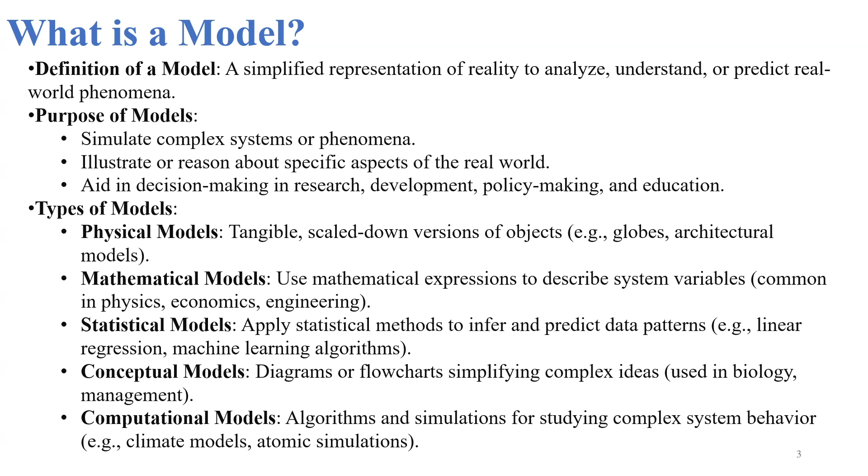Multiscale modeling for mechanical systems can encompass a lot of different aspects. For example, it can consist of atomic structure, molecular structure, mesoscale structure or finite element structure. But the overarching goal is to integrate modeling at different spatial and temporal scales so that we can emulate the real scale phenomenon and we don't have to do experiments over and over, saving computational cost as well as experimental cost.

When we talk about quantum mechanical phenomena, we talk about subatomic particles such as electrons, protons, neutrons, and so on. Electrons are of special interest. There are various methods to solve quantum mechanical phenomena for electrons. One of the most popular is density functional theory. There are different software packages to implement density functional theory, such as Quantum Espresso, VASP, GPAW, Abinit, and so on.

Now we move on to a higher length scale. This can consist of molecular dynamics, where instead of looking at electrons, we look at a system which consists of atoms. There, instead of dealing with quantum mechanical principles, we deal with classical or Newtonian mechanical principles. Using those, we deal with molecular dynamics and force field simulations. Some of the software used for molecular dynamics simulations are LAMMPS, GROMACS, GULP, and others like ASE.

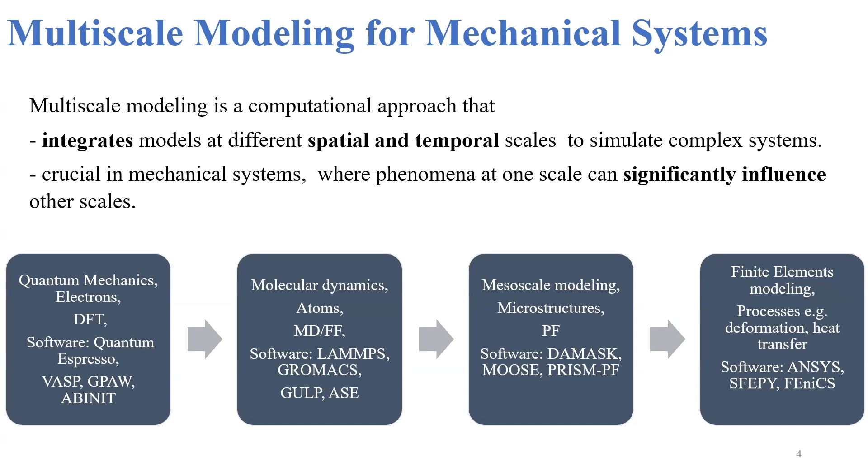So this is just an overview and introduction. During the course, we'll go through the detailed key principles behind these different methods, and also hands-on sessions that will be useful for engineering applications.

Now, this is an overview of different length and time scale simulation methods. We'll see a lot of pictures like this on the internet, where we deal with mesoscale, microscale, and continuum scale phenomena. At the quantum level, we can solve density functional theory or ab initio methods, dealing with the Schrodinger equation, or we can go beyond the femtosecond or nanometer range and deal with the picosecond and micrometer range using atomistic modeling, which uses Newton's principles.

Or we can go beyond that and look into the micrometer or millimeter range using coarse grain mesoscale modeling for polymers, dissipative particle dynamics, and so on. Or we can go beyond that and study using finite element simulation and heat transfer methods. So you can see multiscale modeling has the advantage of studying mechanical principles at different length scales as well as different time scales.

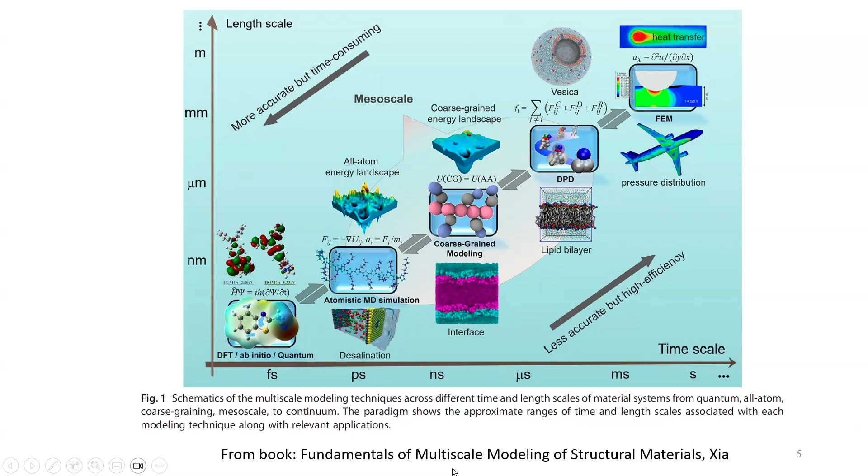And depending on the problem that you are trying to solve, you might use one or a combination of multiple of these methods. You'll see different types of this picture or this plot in different books. So this is one type of representation that is adapted from this multi-scale modeling book, but there can be other similar plots where we have DFT, MD, dislocation dynamics, crystal plasticity, and so on, and where one model is feeding to another model. The information from one model is feeding to another model, such as even density functional theory.

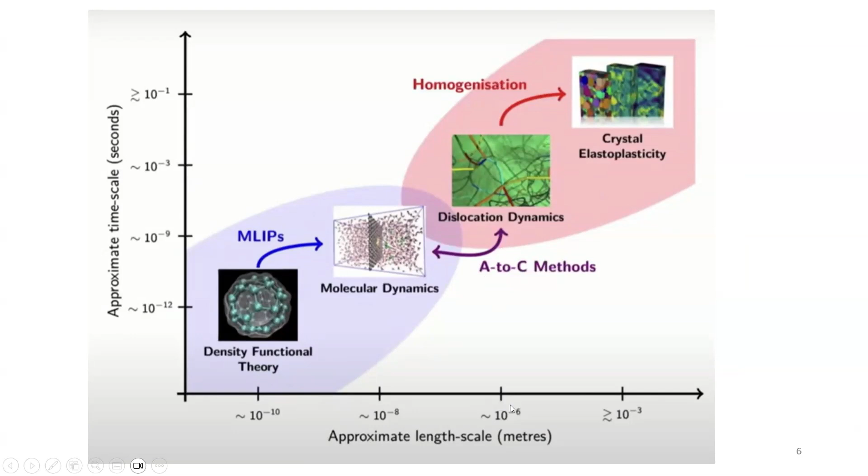We can use machine learning interatomic potentials to feed to molecular dynamics and run temperature-dependent phenomena and large-scale phenomena. So DFT is usually used for 0 Kelvin calculations, but here we can see that it can be used for high temperature and large-scale simulation as well. The information from the molecular dynamics can be fed back to dislocation dynamics and back and forth, that is atomistic to continuum level methods. And then this can be fed, using homogenization techniques, to the crystal elastoplasticity models. And these are some of the approximate length and time scales that are used for certain modelings.

Now, what is multiscale modeling? Multiscale modeling is basically very simple, where we combine different methods that we learned at different length and time scales to solve a particular problem, especially for mechanical systems. So here in this example, we see a molecule simulated with molecular dynamics, or a crack propagation example using FEM, or finite element methods. So traditional approaches such as DFT or MD by themselves can focus on a single scale, but may fail to capture the complete picture of a mechanical engineering problem. And this is why we need multi-scale modeling. So multi-scale modeling can provide a more comprehensive understanding of the phenomenon at different scales, and can be more accurate because it is not looking at only one scale, but at different scales.

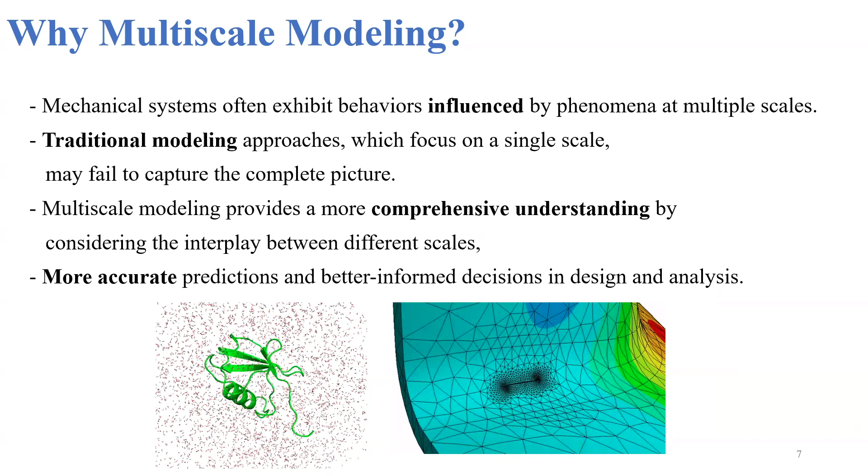Also, the most critical part is how do you validate whether our model is working? So you always have to validate our model against experimental data wherever applicable to make sure that these models actually make sense. So this part is critical, and it's hard to find good benchmark data for validating our model. Now, finally, data integration. We have to integrate data from different sources and scales to make a more cohesive model for a complex process. So that is extremely critical.

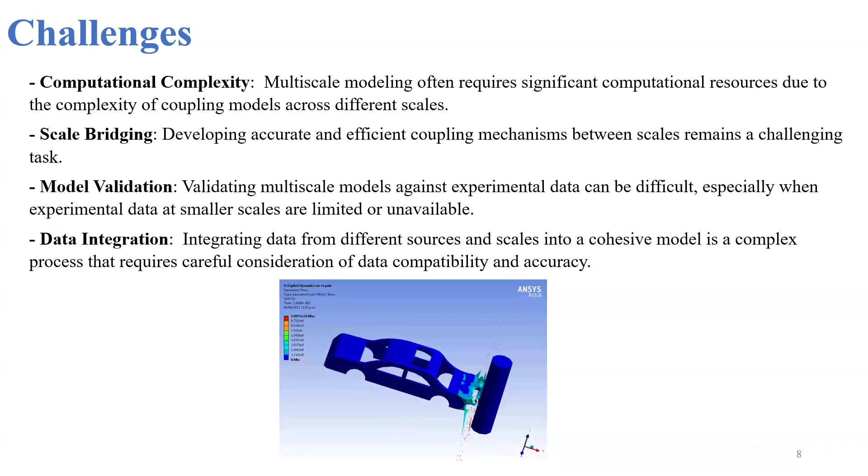Of course, if you have only an iron-based alloy versus an iron and cobalt-based alloy, they might have different responses. So you see, all these methods are kind of interconnected. And it's very difficult to capture the scale bridging and how to validate these models over different phenomena. So we can use this challenge as an opportunity. We can use this as a material design opportunity for multi-scale modeling, which offers the potential to design materials with tailored properties and manipulate behavior at different scales.

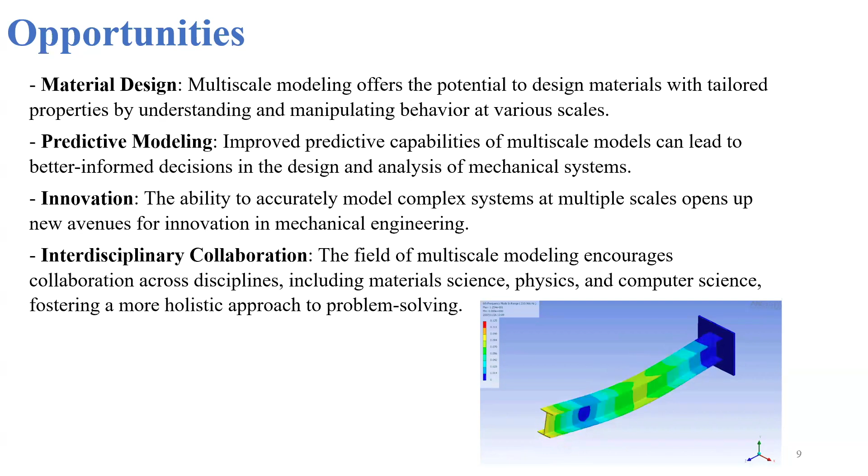We can also use predictive modeling to improve predictive capabilities of multi-scale models that can lead to better informed decisions in the design and analysis of mechanical systems. Or it can lead to different innovation opportunities. So we can look for accurate models or better materials that can solve some of the mechanical engineering problems. Or it can lead to interdisciplinary collaboration, because multi-scale modeling requires information from materials science, physics, computer science, chemistry, and it leads to obvious opportunities for collaboration across different disciplines.

So now I will list some of the laws or principles that you might already be familiar with from your undergrad or grad level courses, but I just list them here to be familiar with, and they will be used for the remainder of the course.

So for example, Newton's laws of motion might be an obvious one. For example, the first law, the law of inertia. Second law is force and acceleration. One of the key principles is force is proportional to acceleration, where the proportionality constant is mass. Or you can have the third law of motion, the law of action and reaction, and so on.

Similarly, very critical or very important are the conservation laws. So conservation of energy, where the total energy of an isolated system is always constant. Energy can be transformed from one form to another, but cannot be created or destroyed. Of course, there can be certain violations or issues, but for mechanical engineering applications, if you're not going to particle physics and so on, I think it's good to conserve energy for a system.

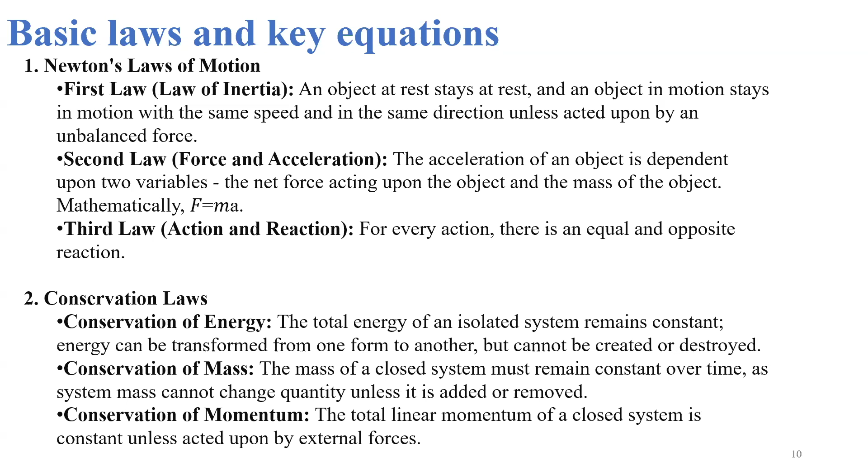Also, you want to conserve mass. So for example, if you're dealing with fluid flow or heat transfer, we want to make sure the mass of a closed system remains constant over time. Also, we want to conserve momentum. The momentum is usually mass times velocity. So you want to make sure the total linear momentum of a closed system is constant unless acted upon by external forces. These are extremely important laws used for mechanical engineering applications.

There are also other laws such as the first, second, and third laws of thermodynamics. The first law says that the change in internal energy of a closed system is equal to the amount of heat supplied, so it's related to the conservation of energy law. Second law of thermodynamics, where heat cannot spontaneously flow from a colder location to a hotter location. This is kind of an entropy argument. Or the third law, which says as temperature approaches absolute zero, the entropy of a system approaches a constant minimum.

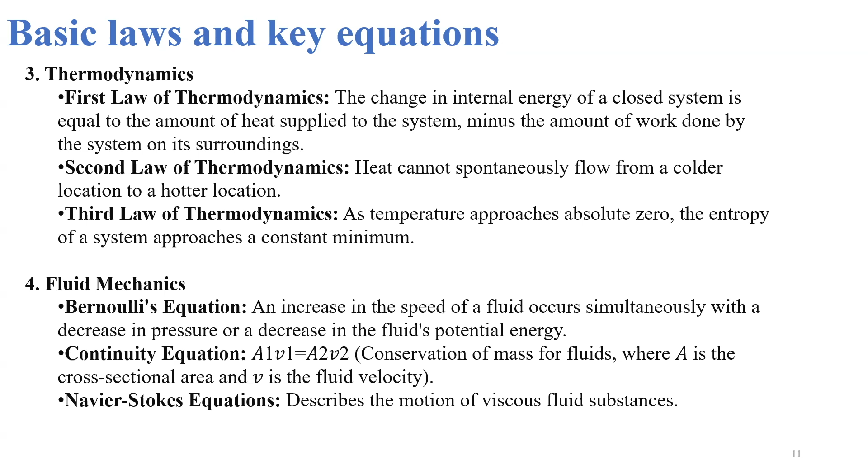Some of the other mechanical principles are the Bernoulli equation, continuity equation, and Navier-Stokes equation. These are important because we'll be solving some of these problems for computational fluid dynamics. For example, the continuity equation is extremely important. A1 V1 equals A2 V2, relating the cross-sectional area and the fluid velocity. For example, if you take a pipe where one end has a small nozzle and one has a bigger nozzle, the area might change, so accordingly the velocity has to change. So that's the continuity equation in fluid mechanics.

Similarly, heat transfer laws. Fourier's law of heat conduction is extremely popular, where it says the time rate of heat transfer through a material is proportional to the negative gradient in the temperature and the area through which the heat is flowing. We are going to work with some of these laws and equations so that you'll have better hands-on experience and actually apply them for engineering applications. Similarly, the Stefan-Boltzmann law and Newton's law of cooling are important.

In material science, of special interest is Hooke's law, which says that stress is proportional to strain, given by a proportionality constant called Young's modulus. This is especially applicable for linear elasticity. Now, if you go beyond linear elasticity, you might have to consider yield criteria, like the von Mises criterion, for which we have to study plastic deformation.

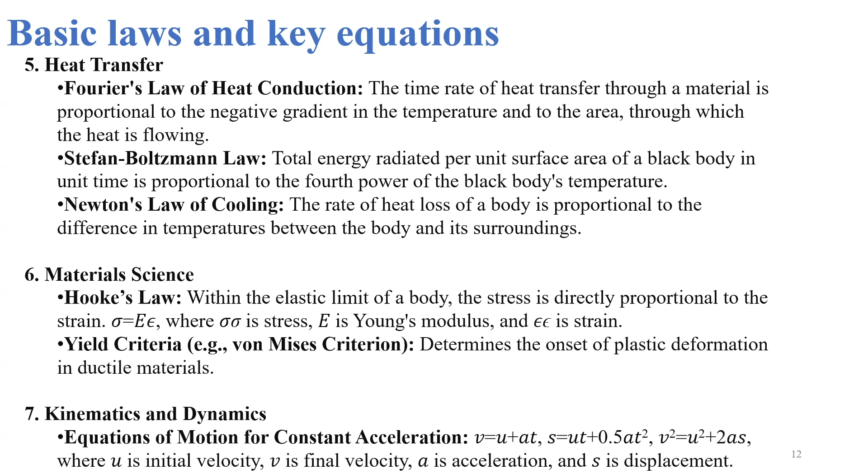Finally, the kinematics and dynamics equations, establishing the relationship between initial velocity, final velocity, time, acceleration, displacement, and so on. For example, the final velocity v is given by the initial velocity plus acceleration times time. Similarly, displacement is given by ut plus half at squared and so on. This is not really necessary, but can be useful for mechanical engineering applications.

So what are the key concepts in multiscale modeling? First, you have to understand time and length scales. You have to find out what problem you are trying to solve, and based on that, identify the particular method you're going to work with. When you have multiscale modeling, such as from DFT to MD or MD to continuum, you have to understand how to link the models at different scales and ensure that information is correctly transferred between them.

For example, if you're trying to simulate a car collision, you want to make sure that you model the material with the particular material parameters, but also use particular boundary conditions to couple the different length scale methods. Also, there are concepts of homogenization, where we derive effective properties at a large scale based on the behavior of a system at a smaller scale. So we want to be consistent, which also relates to the coupling mechanism.

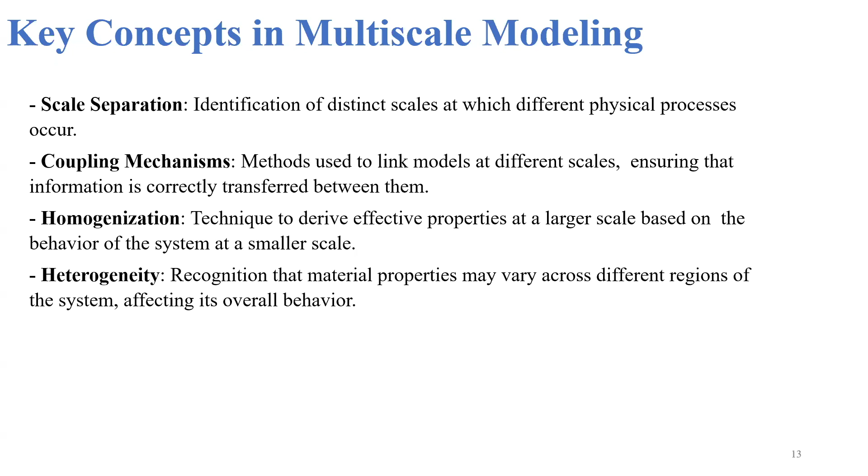Heterogeneity is basically the recognition that material properties may vary across different regions of a system, affecting its overall behavior. It's saying that at different scales of length and time, a material may behave differently. So these are some of the slides for this module.